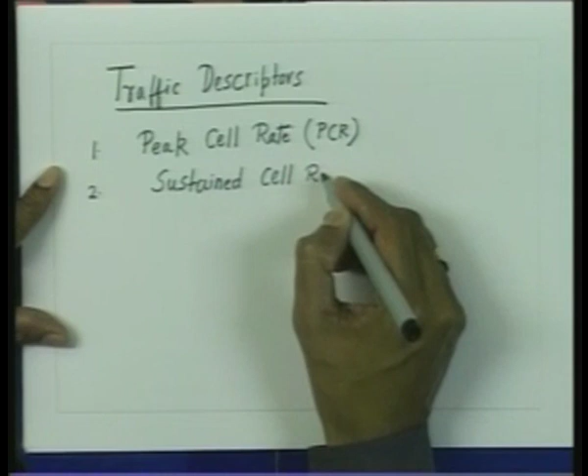A peak cell rate, which is called PCR. Second is sustained cell rate. Third is cell delay variation, or what is called CDVT.

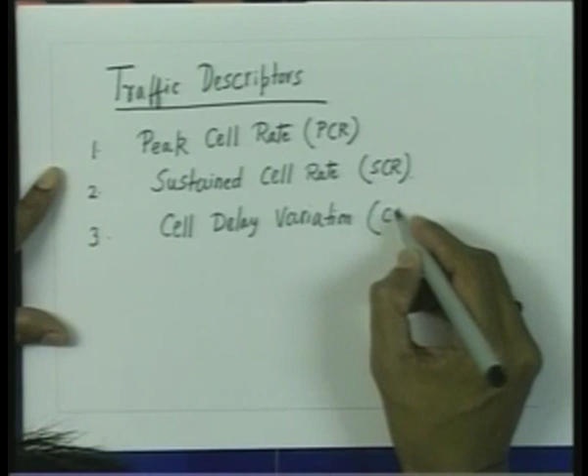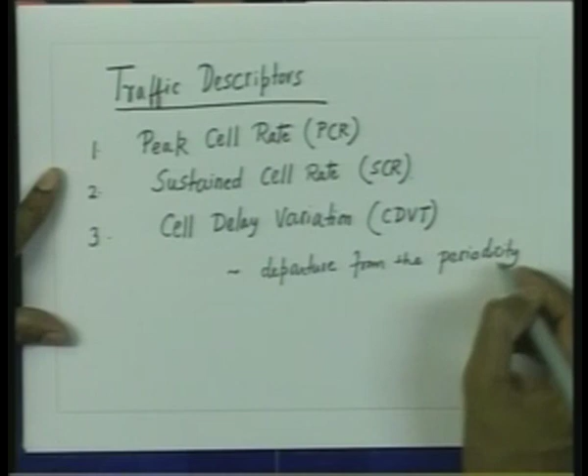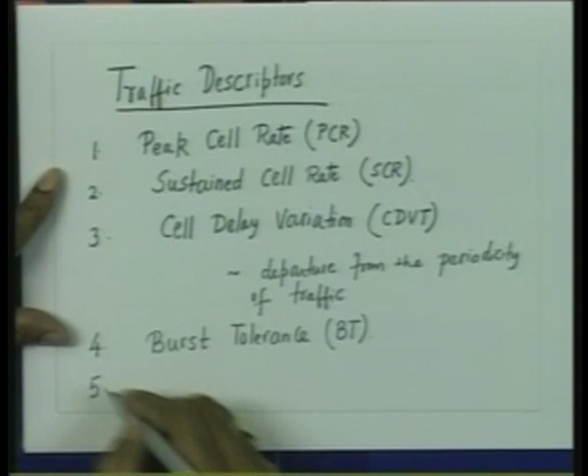Now, the cell delay variation is a measure of the departure from the periodicity of the traffic. Then we have the measure of the burst tolerance, BT, and the fifth is the minimum cell rate, or what is called MCR.

Now, the sustained cell rate is actually a measure of the average rate which the traffic will have, and on the other hand the cell delay variation is the departure from the periodicity of the traffic, maybe the departure from the constant bitrate traffic or the peak cell rate.

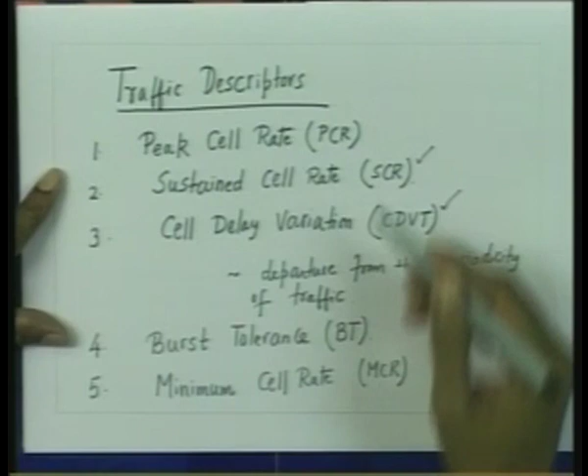The burst tolerance is a measure of the maximum back-to-back packets that can be sent, especially for the bursty kind of VBR traffic, and the minimum cell rate is the minimum data rate that is required to be guaranteed to an ABR traffic.

So typically a CBR traffic may be characterized by the peak cell rate and its departure from periodicity, which is CDVT, cell delay variation. A VBR bursty traffic can be characterized by 4 parameters: peak cell rate PCR, sustained cell rate SCR, cell delay variation, and the burst tolerance. On the other hand, the ABR traffic can be characterized by the minimum cell rate.

Now another problem is that when a source specifies its traffic characteristics in terms of these traffic descriptors and also specifies the quality of service attributes that it wants, how will a network determine whether the call can be accepted or not? That means, how will a network determine whether the traffic is admissible or not?

For that the network requires 2 components. What are those 2 components? The first is that a network must determine whether the traffic source is conforming to its advertised traffic descriptors or not, that is, whether it is conforming to its advertised traffic characteristics or not.

The network needs an admission control algorithm which can determine whether the call can be accepted or not. Naive admission control algorithms can be based on worst case behavior, that is the peak cell rate, but that is not what we want. What we really want is some kind of statistical multiplexing gain in the switch, otherwise there is no point in using an ATM network. We would simply degenerate to a circuit switched network where calls are admitted based on peak rates, but at the expense of inefficiency in slot utilization for bursty VBR traffic.

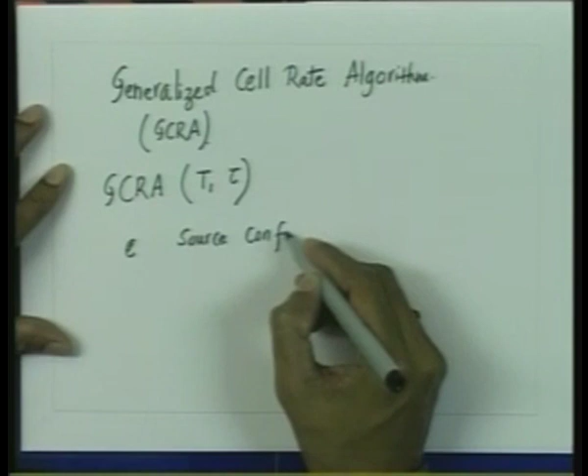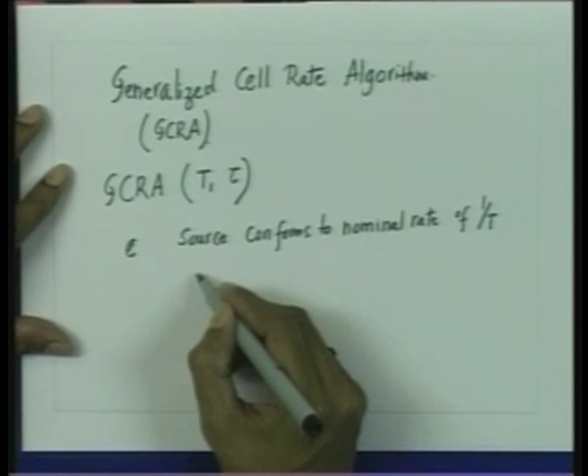The ATM Forum has standardized an algorithm called the Generalized Cell Rate Algorithm, GCRA, typically specified as GCRA(T, tau). The idea is that if a cell or traffic source conforms to the nominal rate of 1/T, then tau is a measure of the tolerance. So the source conforms to a nominal rate of 1/T subject to a tau tolerance limit.

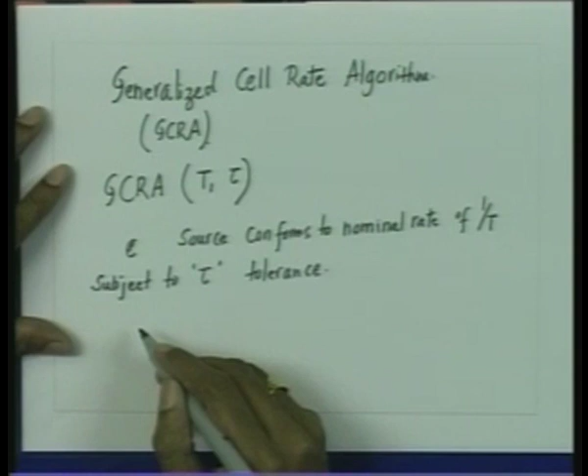Now how does it happen? Let me explain whether the source is conforming to the GCRA(T, tau) parameters or not. One thing I'd like to say is that this is a method of specifying traffic characteristics through deterministic bounds. Basically, we are specifying some kind of deterministic envelope on an otherwise statistical bursty VBR traffic. Let us see how we can specify that.

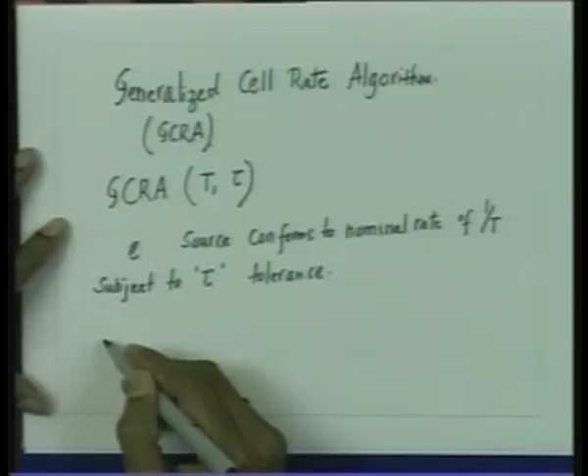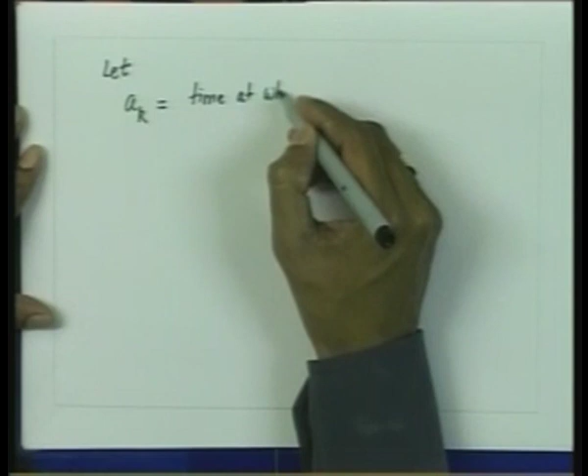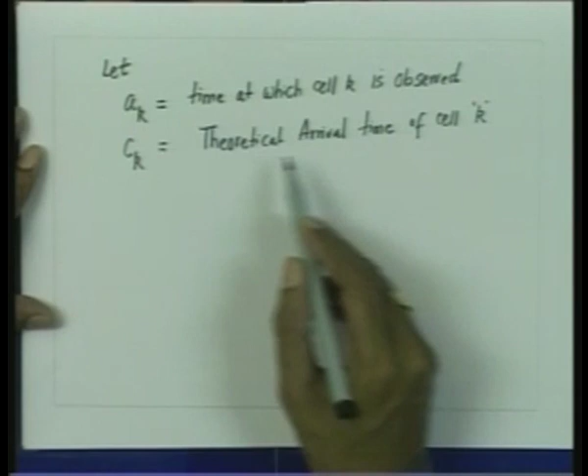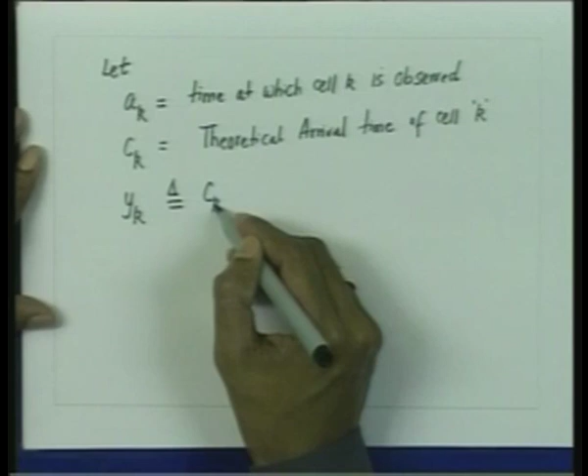Let AK be the time at which cell K is observed, and CK be what is called the theoretical arrival time of cell K. The theoretical arrival time is the time at which the cell should arrive theoretically, and AK is the time at which cell K has actually been observed or has arrived. Let YK equal CK minus AK. Then we say that cell K is conforming to GCRA(T, tau) if YK is less than tau.

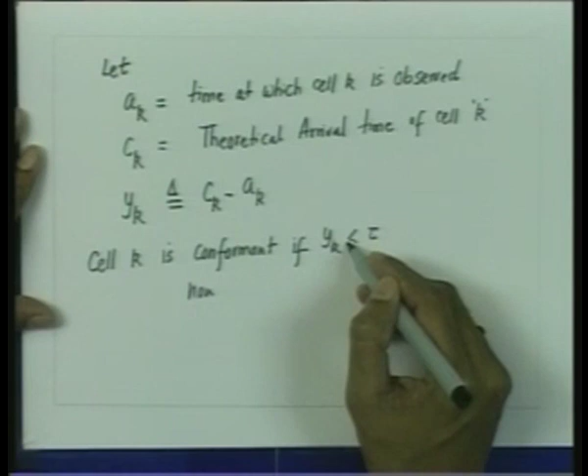That means the difference between the time at which the cell has actually arrived minus its theoretical arrival time should be less than tau. Then the cell is conformant. It is non-conformant if YK is greater than tau.

If the cell is conformant, then CK+1, the theoretical arrival time of the K+1th cell, will be set to the maximum of AK or CK plus T, if YK is less than or equal to tau. If the cell was non-conformant, that is YK is greater than tau, CK+1 remains CK. Essentially, tau measures the departure from the nominal rate, which is 1/T.

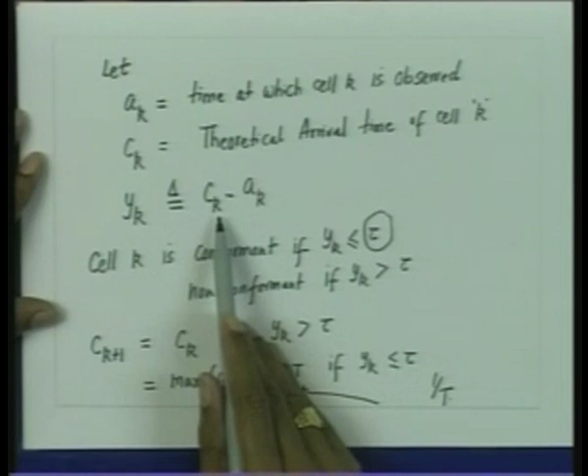What is really important here for the cell to be conformant is that the difference between its theoretical arrival time and the actual arrival time must be within tau limits, otherwise the cell will be non-conformant if it is greater than tau. The late arrivals of cells will actually delay the possible allowable theoretical arrival times of the K+1th cell, as we can see from these equations.

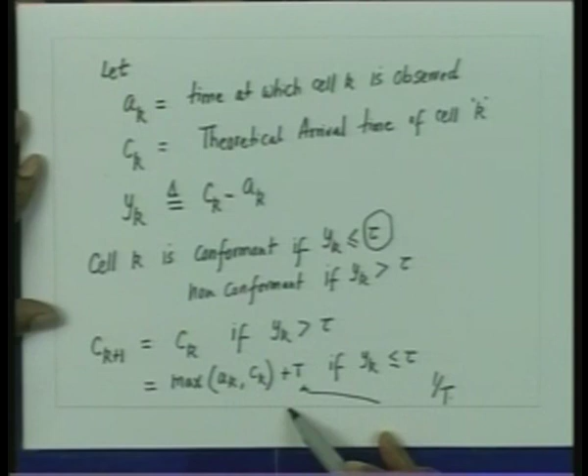Now let us consider an example to explain this point. Remember that a VBR traffic is generating bursty variable bitrate characteristics. What we are trying to see is whether the arrival times of the traffic that is being generated conform to these GCRA(T, tau) parameters or not.

Let us, for an example, consider that we have GCRA(10, 3) as a parameter. Let us see how an example works like GCRA(10, 3).

Now what is the matter of GCRA 10,3? Here T is 10 and tau is 3. Let us say C0 is 0, and consider an example where the arrival times are 1, 8, 19, 27 and so on. Now let us try to see whether these arrival times are conformant to 10, 3 or not. The interpretation is that the nominal arrival rate is 1 by 10, with a periodicity or tolerance of 3. That means the cells are expected to arrive at 0, 10 and so on, but there could be a departure subject to the tolerance of 3.

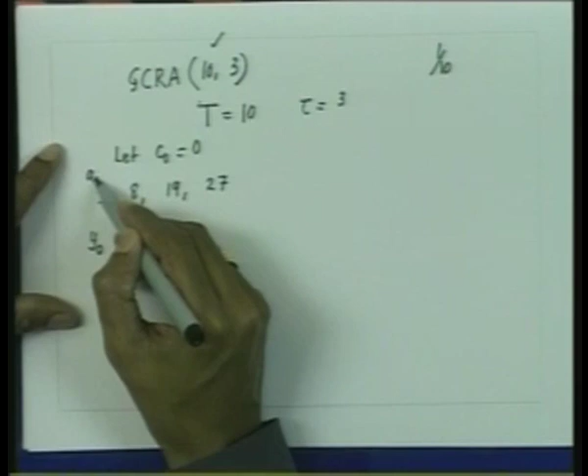Let us see whether these cells 1, 8, 19, 27 are conformant or not. So what is Y0? Y0 happens to be 0 minus 1, that is C0 minus A0. Remember that these are A0, A1, A2, A3. So this is minus 1. What is minus 1? Minus 1 is less than 3. So definitely cell 1 is conformant.

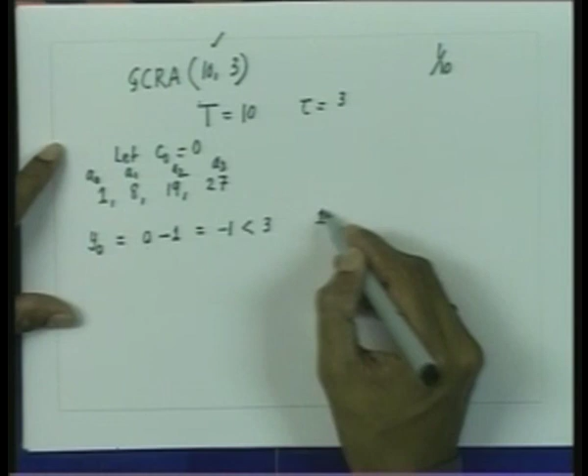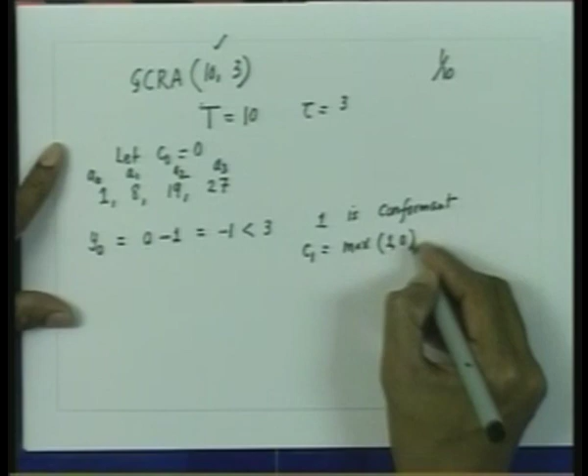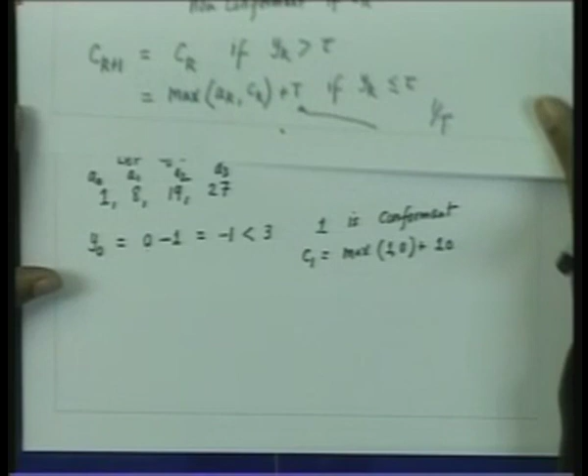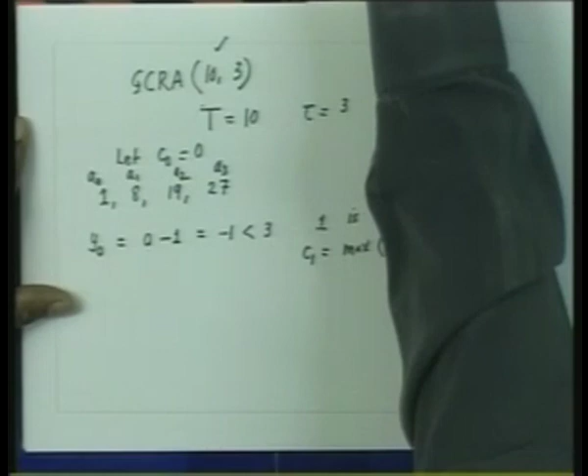Now since it is conformant, what will be the expected theoretical arrival time of the next cell? The expected theoretical arrival time of the next cell C1 will be set as max of 1, 0 plus 10, as per our earlier formula, that is max of AK, Ck plus T. So C1 is max of 1, 0 plus 10, which gives us 11. So since the cell has arrived at 1, the expected theoretical arrival time of the next cell is required to be 11.

But the next cell actually arrives at 8, it arrives earlier. So let us try to see whether it is conforming to GCRA 10,3 or not. So what is Y1? Y1 becomes 11 minus 8, which is equal to 3, and since 3 is less than or equal to 3, 8 is conformant. Since 8 is conformant, we need to set the next arrival time, which is C2, and C2 will be set as max of 11 and 8 plus 10, which will be set as 21.

Now what about Y2? A2 has come at 19. C2 was 21. 21 minus 19 is 2, and 2 happens to be less than 3. So indeed this cell is conformant. So the cell 19 is conformant, and since cell 19 is conformant, my C3 is set as max of 21 and 19 plus 10, which is 31.

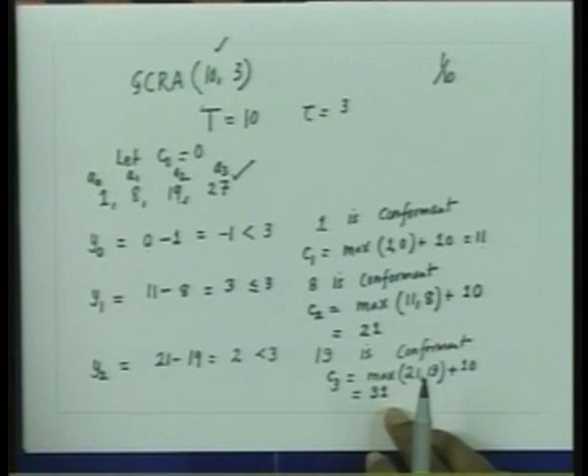Now this is 31. Now the next cell, A3, comes at 27. It is expected to come at 31, but it comes at 27. So let us see whether the cell coming at 27 is conformant or not. The expected theoretical arrival time is 31, and we will try to see whether the next cell is conforming to that or not. Next cell is coming at 27. So our Y3 is 31 minus 27, which is 4. Now this 4 is definitely greater than 3, and therefore 27 is non-conformant.

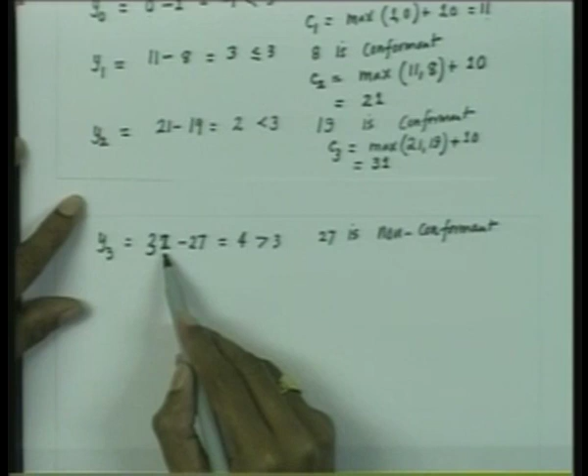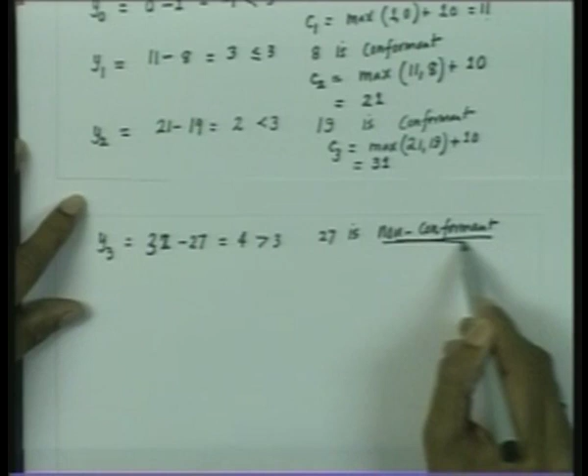What has happened? The GCRA 10,3 specification says that since the previous cell had come at 19, the next cell can actually come at 31 only. Now since the next cell is coming earlier, at 27, if it had come at 28, the difference would have been 3 and the cell would have been conformant. But since it came a little earlier, it is a violation of the departure from the periodicity, and therefore this cell will not be allowed. So it is indeed a non-conformant cell.

Now another way of representing this GCRA 10,3 is by what is called a leaky bucket algorithm. Popularly, this GCRA 10,3 has been implemented as a leaky bucket algorithm. I will explain through the same example how things can be interpreted in terms of the leaky bucket algorithm. But before that, I want to tell you that in practice, a traffic source is generating variable bitrate bursty data. Suppose it has negotiated with the network that it will specify its traffic descriptors in terms of certain T and tau parameters.

Now the network knows that the source will be transmitting its data in a manner that conforms to these t and tau parameters, but the source is generating a variable bitrate or bursty data which is essentially statistical in nature. So then what do you do at the source?

At the source we will put this GCRA t, tau traffic shaper, whose output will conform to these GCRA t, tau parameters. At the network we will put a similar GCRA t, tau traffic regulator or monitor, which will see whether the cells coming from the traffic source conform to those t, tau parameters or not. So the device at the source will regulate or shape the output so that the traffic conforms to these parameters, and the device at the network will make sure that the traffic source is indeed conforming to those advertised traffic descriptors of t and tau.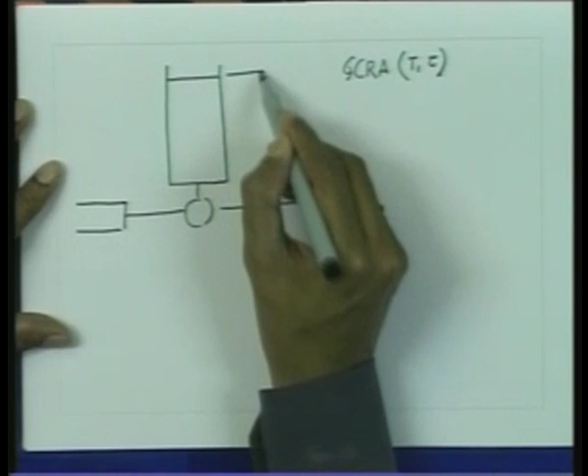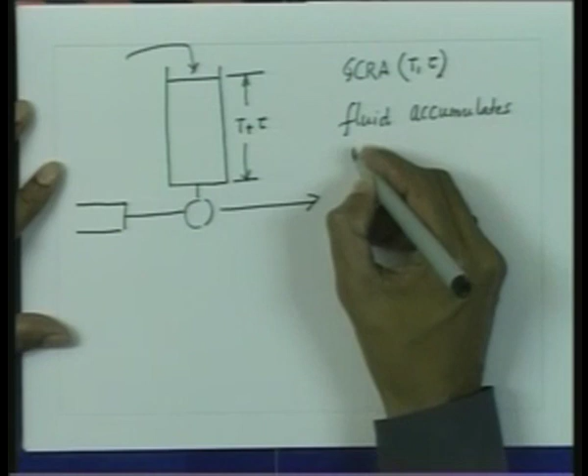Now this is a leaky bucket for GCRA t, tau. This bucket has a maximum depth of t plus tau. Fluid accumulates in the bucket at unit rate.

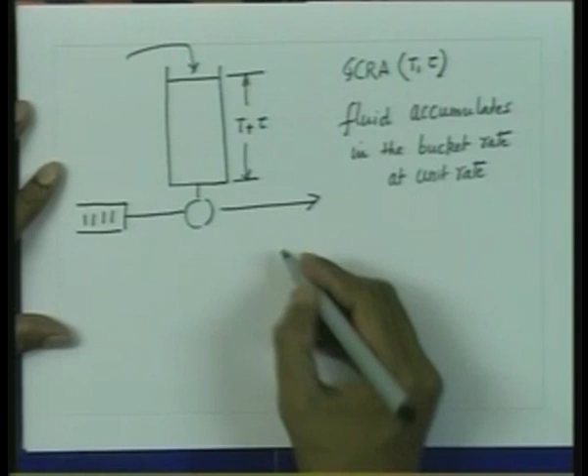Now the cells are coming. Whenever a cell comes, it takes away t units of fluid. So each cell takes away t units of fluid.

Now if a cell comes and finds that the fluid content in the bucket is less than t, then the cell becomes non-conformant.

If we are putting this device at the source, then if a cell comes and finds that there is less than T units of fluid in the bucket, the cell will simply wait in the buffer, and it will be transmitted only once the content becomes at least equal to T in the bucket.

But if this device is put at the network side, and a cell comes and finds that the bucket does not have enough fluid, then that cell is not conforming to GCRA T, tau, and the network may drop this cell because it is not conforming to the advertised traffic contract.

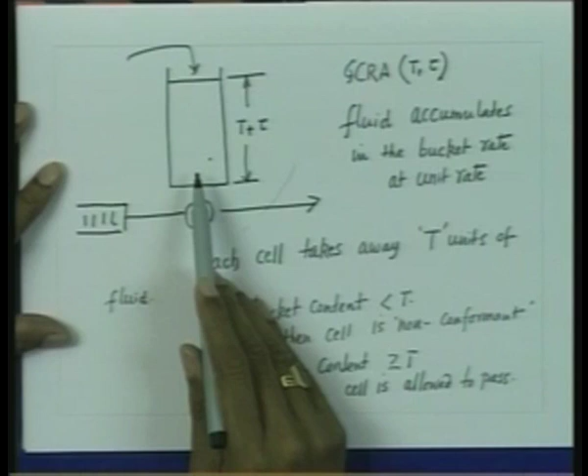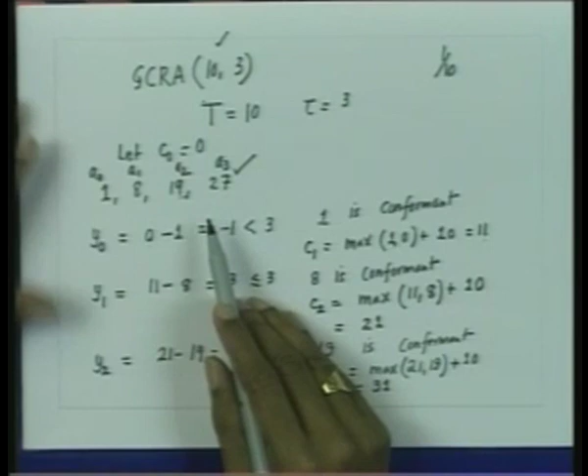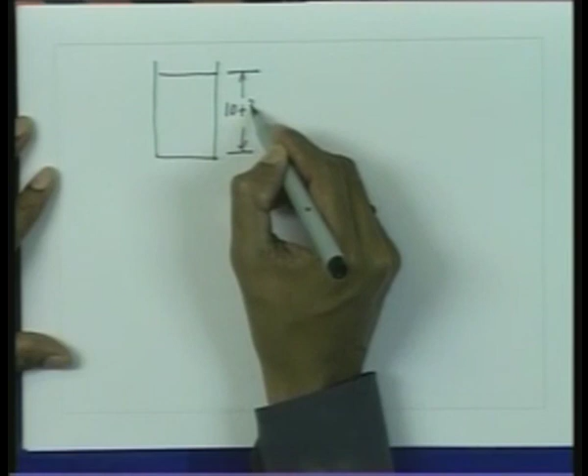Now let us take the same example we had considered earlier, GCRA 10,3, and try to explain it by the leaky bucket. By this example, initially the bucket contained T plus tau, which in this case was 10 plus 3, equal to 13. So we are trying to explain this for GCRA 10,3.

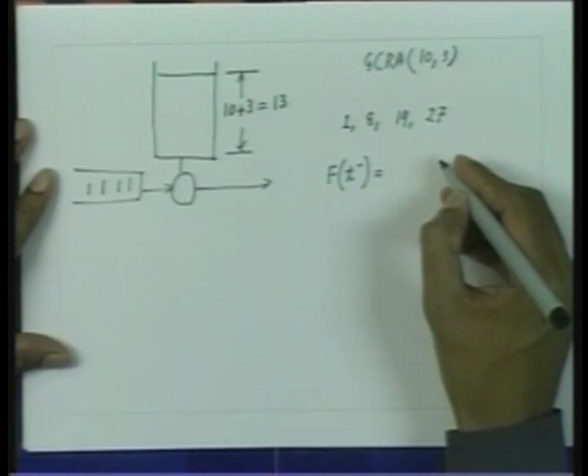Here is a leaky bucket structure. These cells are coming at different times, and we had assumed that the cells are coming at times 1, 8, 19, 27. Now let F(T-) denote the content of the bucket just before time T, and F(T+) denote the content of the bucket just after T. Let us see what happens.

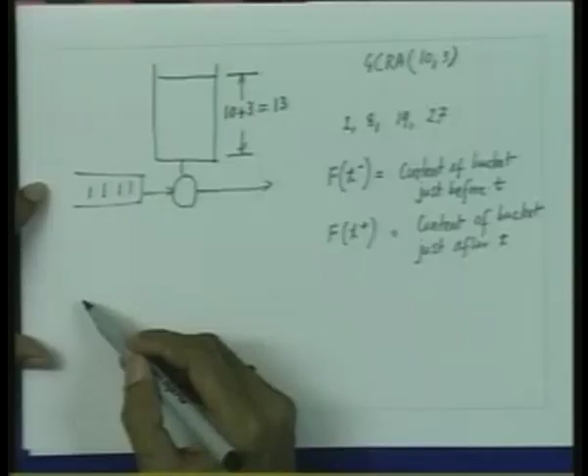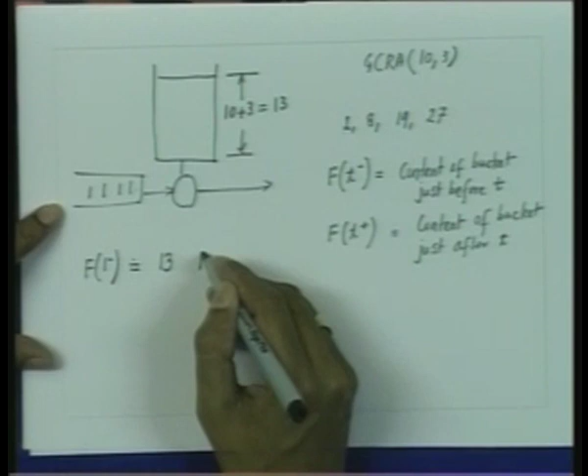The first cell comes at time 1, when the content is 10 plus 3, 13. So F(1-), this content is 13. Now this cell comes at 1, and it takes away T units of fluid as we said. So when this cell goes, F(1+), the content becomes 3, because it takes away 10 units of fluid.

So at F8 plus, the content will become 0 because it will get decremented by 10. There will not be any fluid remaining now F8 plus. Now the third cell comes at 19, so F19 minus. The content in the bucket would be how much? Here there were 0, and from 8 plus to 19, we would have accumulated the content to be 11. Therefore on F19 minus, 19 plus, the content would become 1.

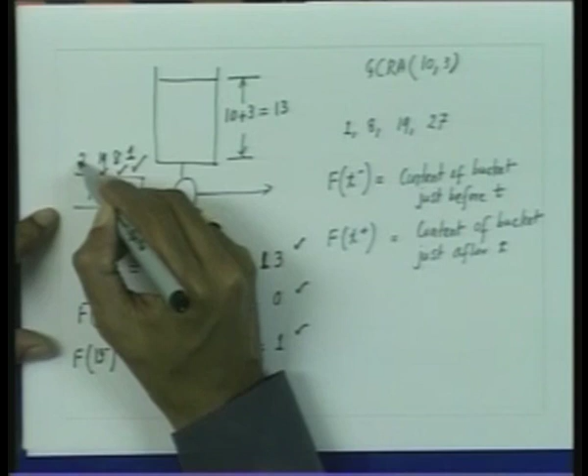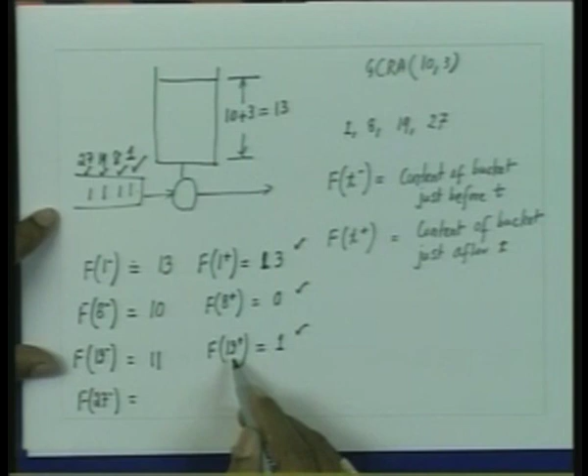So now let us see what will be this content, F27 minus. Now the contents at F27 minus would actually be 9, and this is not sufficient for this cell to pass through, because minimum 10 units of fluid are required in the bucket. So as a result, this cell is declared non-conformant.

Now if this device is being used at the source, then this cell 27 has to really wait in the buffer, and how much time does it have to wait? It has to wait for 1 more unit of fluid to get accumulated. That means it has to wait till the time becomes 28, and when the time becomes 28 minus, then the content in the bucket would become 10, and then the cell can be passed through.

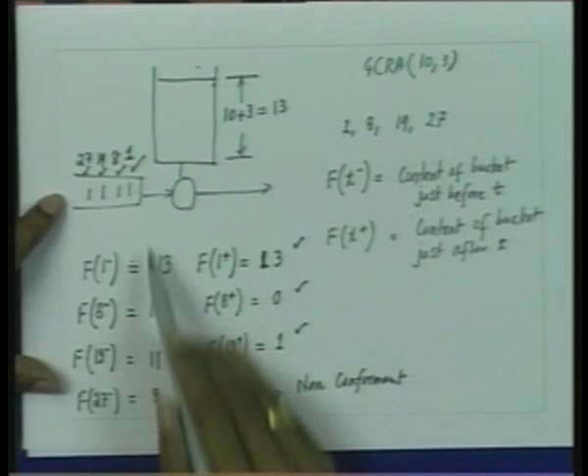So now we have seen how this can be implemented in terms of the leaky bucket algorithm. Although for explanation purposes we are saying here that the fluid accumulates in the bucket at a unit rate, and a cell takes away capital T units of fluid whenever it comes, in practice it will be implemented simply as a counter.

So what we are saying is that a counter has a certain maximum unit up to which it can count, and in this case it is T plus tau. The counter is incrementing at a unit rate, it keeps on counting, and whenever a cell comes, the counter needs to be decremented by capital T.

And if you find that by decrementing by capital T, the counter does not become negative, meaning you can decrement it by the full capital T amount without it going below 0, then that cell is conformant and is allowed to pass through, and the counter is decremented by the capital T amount. So this can simply be implemented as a counter.

Now remember, at the traffic source, this works like a traffic regulator or a traffic shaper, and at the network side it works like some kind of a traffic monitor. Now as we have seen, the traffic descriptors which a network is actually asking the source to specify are things like peak cell rate and the cell delay variation tolerance. So now let us see how these conform to those kinds of traffic descriptors. Let me just explain that.

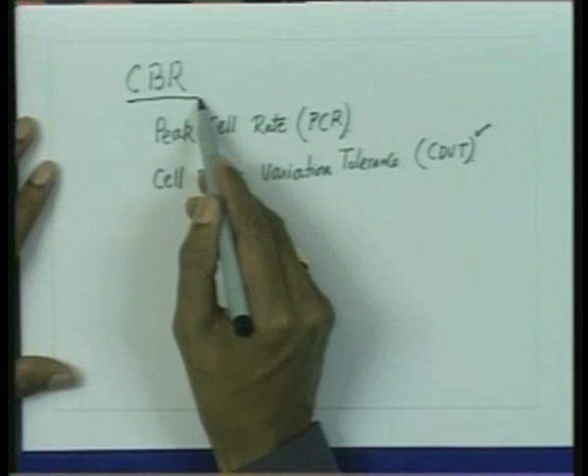So we say that a CBR traffic, when it specifies its peak cell rate and cell delay variation tolerance, means that all the cells should be conformant for GCRA R by PCR, CDVT, where R is the line rate.

Where R is the line rate. Now what does it mean? It actually means that the cell can come at the peak cell rate, but the CDVT, that is the cell delay variation tolerance, actually measures the departure from its exact periodicity.

So let us say, for example, that GCRA 5,0 - what is 5,0? 5,0 means that R by PCR is 5, and CDVT is 0. By saying R by PCR is 5, it actually means that the peak cell rate is 20% of the line rate.

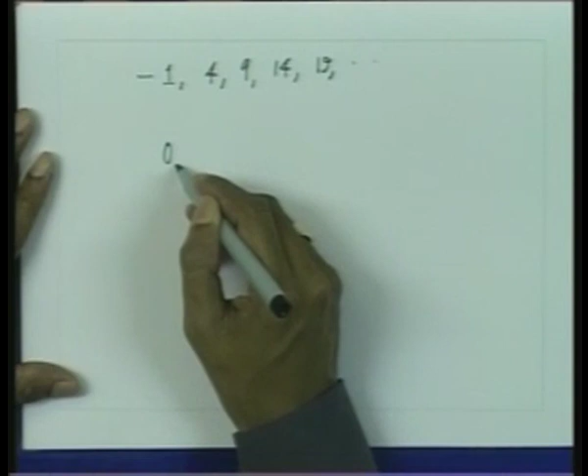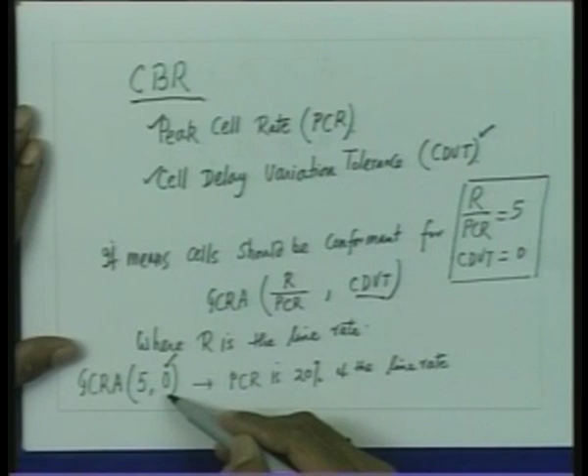Another cell sequence which will be possible is 0, 5, 10, 15, 20, and so on. This conforms to the constant bit rate of GCRA 5,0. If we had some tolerance for cell delay variation, it would have determined the departure from the exact periodicity, as we considered in the previous example of GCRA 10,3.

GCRA 10,3 means 10 is equal to the ratio of R by PCR. In that case, the peak cell rate is 10% of the line rate. So the capital T is 10, but the tolerance 3 is measuring the departure from the periodicity of this constant bit rate source.

Now let us see how we can represent the burst tolerance. This is okay for constant bit rate traffic, but what about bursty variable bit rate traffic? Because it will actually be sending back-to-back cells in the form of a burst, and for a long interval of time it may not send any packets, and suddenly it may send a burst.

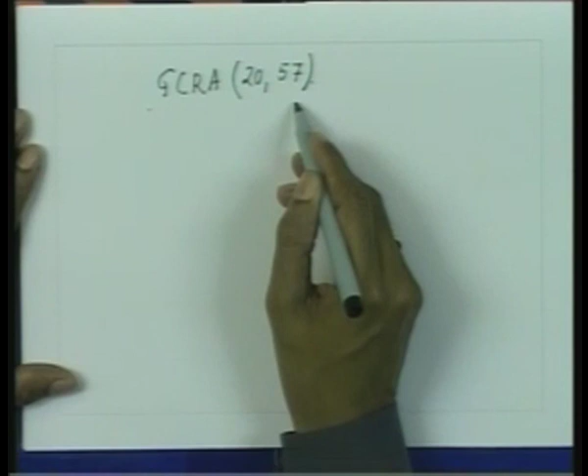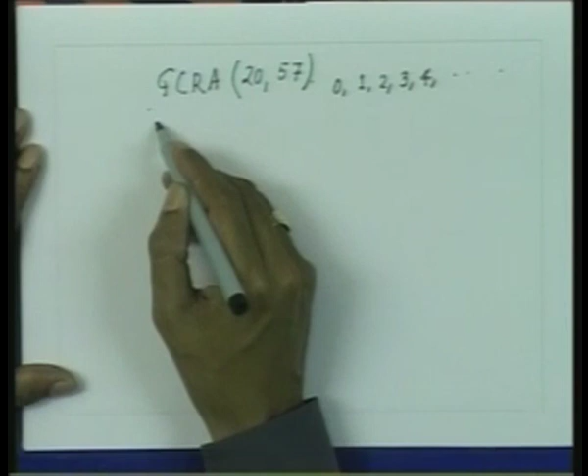Now let us say we have a traffic source. Let me explain with this GCRA(20, 57), and let us say that the cells are coming at 0, 1, 2, 3, 4, and so on. These are the cells which are coming. Now let us see what happens.

The leaky bucket will have 77 units of fluid initially, which is 20 plus 57. So these are the cells which are coming. F0 minus, and the cell is coming at 0, the fluid amount was 77. Now when this cell came, the first cell at 0, it takes away 20 units of fluid, the capital T - this is capital T and this is tau. When it takes away 20 units of fluid, F0 plus becomes 57.

Now the second cell comes at time 1. Let us see what is F1 minus. F0 plus already has 57 units of fluid, and 1 unit of fluid would have entered in the time from 0 to 1, so the total units of fluid will be 58. Now this cell will take away 20 units of fluid, and therefore the fluid content F1 plus will become 38.

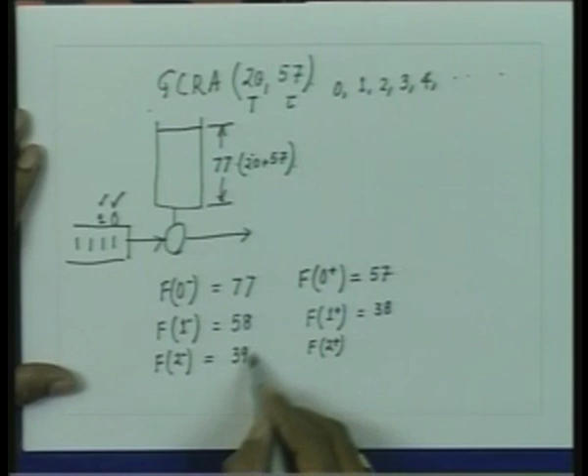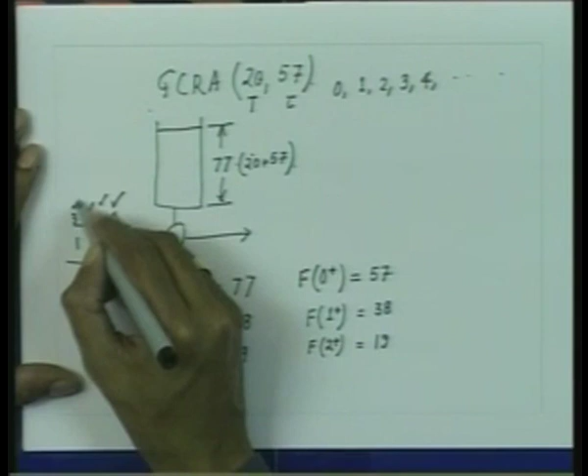F2 minus - remember here there is 38 units of fluid, and one more unit of fluid will accumulate, making it 39. When cell 2 comes, it will decrement by 20, and therefore F2 plus will become 19. Now the third cell comes at F3 - what will be F3 minus? Just before time 3, 19 units of fluid are already there, one more unit accumulates and it becomes 20. So when the third cell comes, it decrements by 20 and F3 plus becomes 0.

Now these 4 cells at 0, 1, 2, 3 are allowed to transmit. Now the fourth cell, if it comes, cannot transmit here because it needs enough amount of fluid to get accumulated.

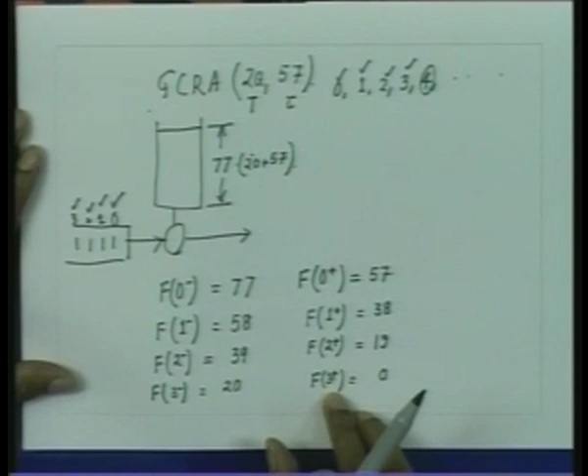So for how much time does it have to wait? It has to wait till 20 units of fluid get accumulated. Since the fluid is accumulating at a unit rate, it will have to wait till F23 minus that. The cell will have to wait for 19 more units because it has come at time unit 4. It has to wait for 19 more units in the buffer before it can be allowed to transmit.

Now what is the interpretation of this? The interpretation is that on an average, the source can transmit 4 cells back to back, that is what we have allowed.

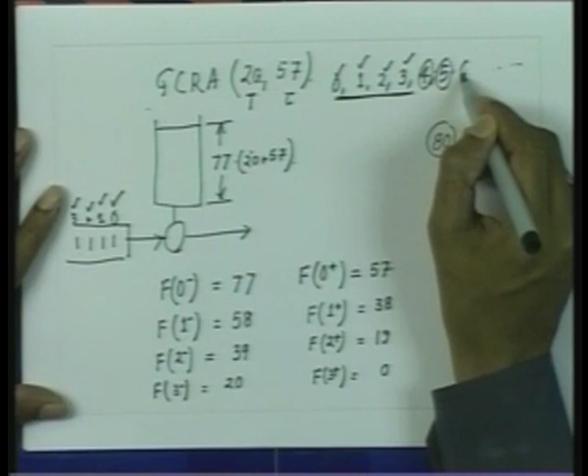Now if the source again wants to transmit back to back cells, it has to wait till time 80. At time 80, if these 4 or 5 cells are not transmitted and you want to transmit these back to back cells again, let's say cells 4, 5, 6, 7 have come. If you want to transmit cell 4, there will be enough fluid content at F23 minus, and you can transmit it, but then immediately F23 plus will become 0, so the 5th cell you cannot transmit. So if you want to transmit these 4 back to back cells, you need to wait till time 80. At 80, 81, 82, 83 you can transmit 4 back to back cells again.

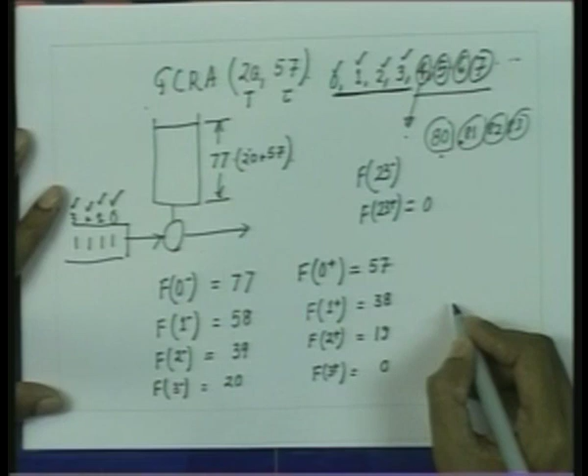So what is happening essentially is that the source is able to transmit approximately 4 cells in a time unit of 80. If it has to always transmit in bursty form, it can transmit 4 cells in a time unit of 80. This gives an average rate of 4 by 80, that is 1 cell approximately every 20 time units. On the other hand, the maximum burst it can transmit is 4 cells back to back. So this represents a variable bitrate bursty source, whose average rate is 1 cell every 20 time units. On an average it can transmit 1 cell in 20 time units, and it can transmit a maximum burst of 4 cells back to back.

So this is like saying that the sustained cell rate, or the average cell rate, is 1 cell in every 20 time units, and its maximum burst size is 4 cells back to back.

So for VBR traffic, the ATM forum specifies that the source should be conforming to the peak cell rate, the cell delay variation tolerance, and burst tolerance, and sustained cell rate.

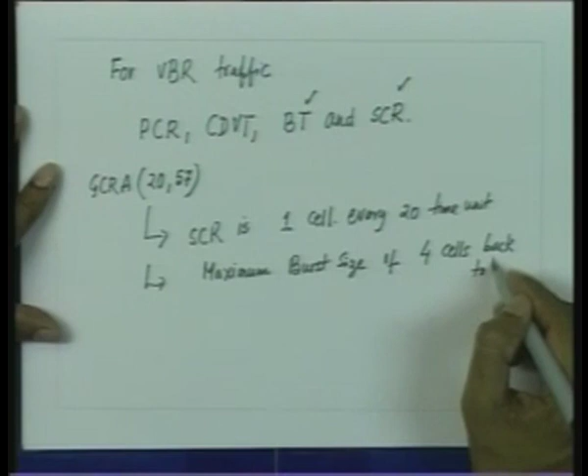We saw that those 4 cells back to back, when sent as 0, 1, 2, 3, later on may be sent as 80, 81, 82, 83.

So what is the minimum time interval between the cells, if you want to know the peak cell rate? What is the peak cell rate? Obviously the peak cell rate, the minimum time interval, comes out to be 1, and the cell delay variation tolerance comes out to be 0.

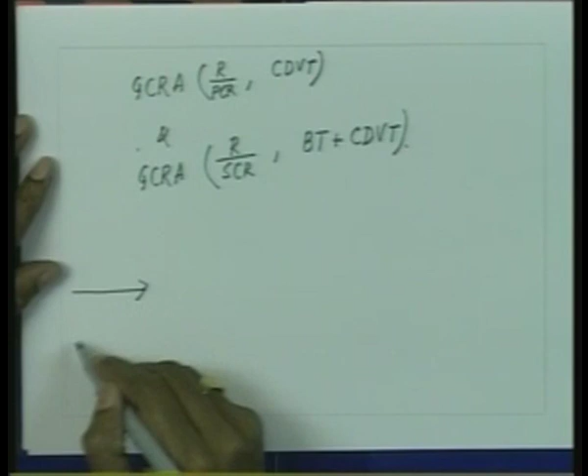If a traffic stream is coming, it should first pass through a leaky bucket, which will make it conforming to GCRA R by PCR and cell delay variation tolerance, and then it should also conform to R by SCR, burst tolerance plus cell delay variation tolerance. It should be conformant for both. This gives you that it is conformant to the minimum transmission time or minimum interval between cells, and the other leaky bucket, R by SCR and CDVT, gives you that it conforms to the burst tolerance and the sustained cell rate.